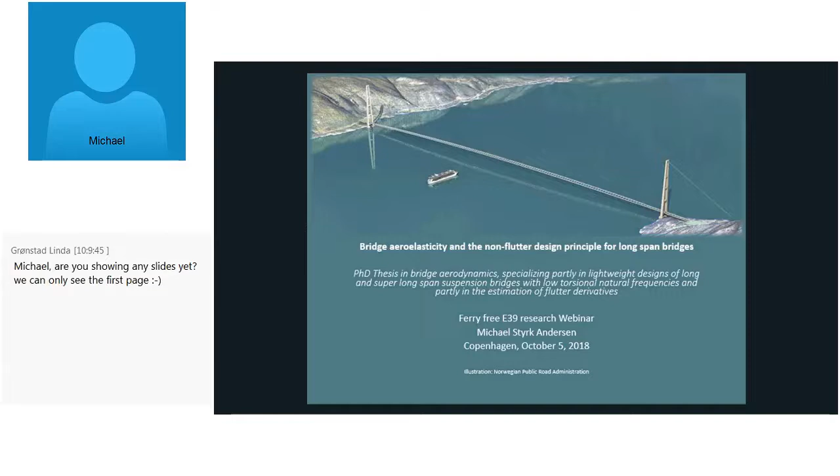So, in order to explain how torsional flutter was avoided in our test, we have to deal with the system identification methods being used and try to enhance them in order to minimize the residual and optimize our model fit to the test. So I did a little bit of development on how to use these methods, and that is also covered in this thesis.

But the main work is the development of a bridge deck where a low torsional natural frequency can be obtained without sacrificing the stiffness in the torsional degree of freedom. This includes several rounds of wind tunnel studies of triple box cross-sections.

When we say a triple box section, it means basically that we have 3 boxes that are mechanically interconnected, and it consists of 3 separated bridge decks, but they are widely separated, so the flow can go across it. If you have 3 decks, one here, one here, one here, the flow can go like this, and no, it's only 3 decks.

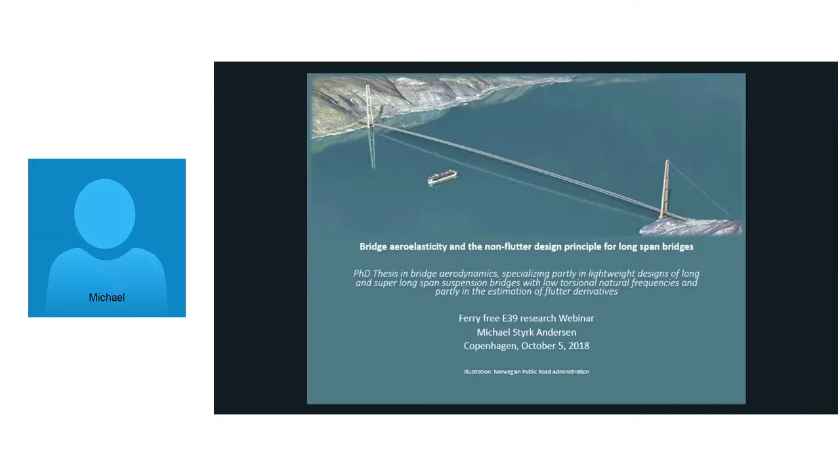So let's move to slide number 2. I guess I already introduced the subject. The rest of the outline is basically a presentation of the main research question, and next what kind of methods I used to study that, and then I will dig a little bit deeper with the main findings. And finally, I will sum up and give the conclusions.

So there are a lot of wide fjords in, for instance, Norway, which should be crossed by very long span bridges or other kinds of structures. And for these straits that are longer than, say, 1.6 or 1.7 kilometers, we need to develop new technology in order to cross them, or at least we know that the way we built bridges in the 60s and 70s in the last century may not be feasible for such long spans. So we're looking at other kinds of designs involving 2 or 3 bridge decks in order to enhance the aerodynamic stability mainly.

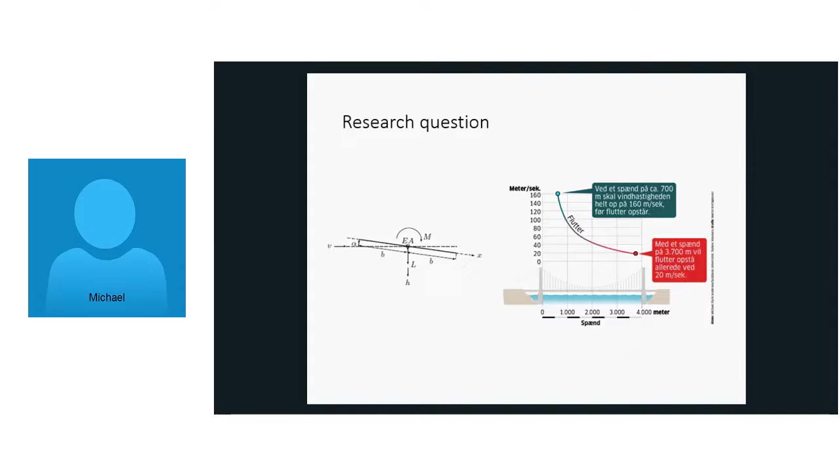And the question I'm trying to answer is: is it possible to design a lightweight bridge deck that is aerodynamically stable by using this non-flutter design principle? And so what is the non-flutter design principle? Yeah, it's basically the hypothesis that flutter can be avoided by having a low torsional to vertical frequency ratio. But is it lower than 1? Is it lower than 1.1? Or is it lower than 1.2?

It's a good question. If you look at the flutter curve, you see that there's no solution to the flutter wind speed below 1.1. So in that case, it would be 1.1. It's an important question, because if you make it 0.7 or 0.8, you have to sacrifice a lot of torsional stiffness in order to go that low.

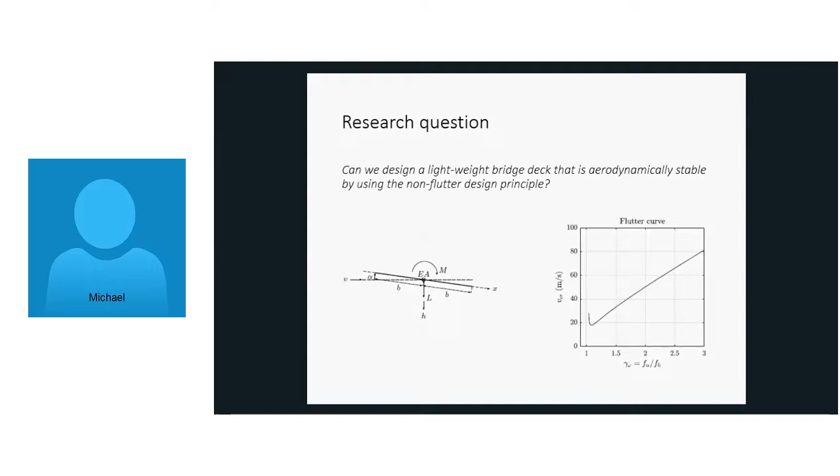But then again, on the other hand, this is just linear theory for a flat plate, and the aerodynamics of a bridge deck that is going to span 2 or 3 kilometers is far more complex than just a simple flat plate. So I'll shortly introduce the methods I've been using.

If you have a simple suspension bridge, which is a phrase that I think was introduced by Arne Selberg, describing a suspension bridge having only a main span and no backstays, we have a given mass and stiffness distribution of the bridge deck and the main cables, which gives us some input we can use in a static analysis. And when we have reached the dead load situation where we have equilibrium, we can conduct a modal analysis to get the frequencies of the vertical and torsional modes, for instance.

These modal parameters are used in the wind tunnel tests we're conducting of a given cross-sectional shape. And the interpretation and the data analysis of these tests tells us a lot about the performance of this kind of shape in the given condition that it is going to operate in. And finally, we can use the results from the wind tunnel test to conduct flutter analysis and static divergence analysis.

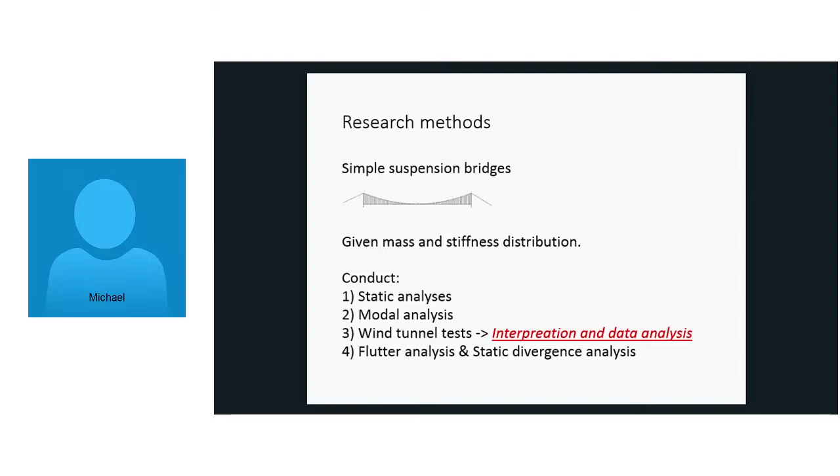Okay, for the static analysis, it's important to realize that these structures are very slender and very flexible. So the displacements of the bridge deck are important for the stiffness distribution in the main cables. It means that you have to iterate until you get the stresses in the dead load situation and thus the stiffness. And if you're looking at the static analysis for the wind, you have to deal with some nonlinear steady aerodynamic loads, which means that you have to solve the equilibrium step by step.

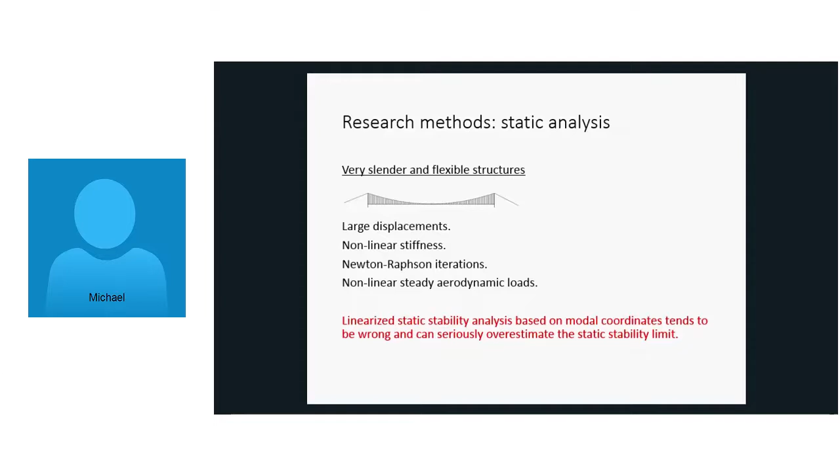And in some of the older textbooks, there's usually a formula for torsional divergence, which is based on the equivalent modal coordinates for pure torsional divergence, and this tends to be wrong and can seriously overestimate the static stability limit, because it relies on a linearization of a highly nonlinear problem when we talk about long-span suspension bridges. So instead, you should use a finite element approach and use Newton-Raphson iterations to get the displacements step by step.

Yeah, you can see the convergence criteria for these Newton-Raphson iterations. When are you satisfied with the displacements you have obtained during your finite element analysis? It's basically defined by the sum of differences between the last steps. So you reach your convergence criteria at the point where the Euclidean norm is below some level which you define in your analysis. You have to reach convergence in order to move on with the aerostatic analysis.

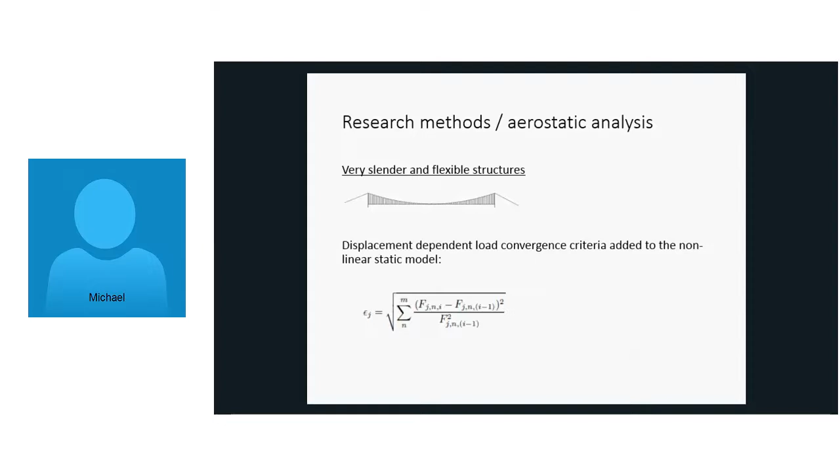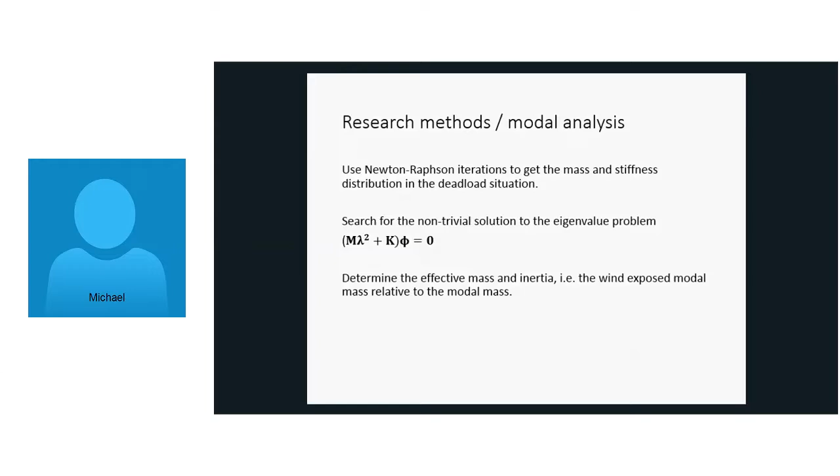When dealing with the modal analysis, we're obtaining the mass and the stiffness distribution in the dead load situation, and then we solve the eigenvalue problem, which gives us the eigenvalues and the mode shapes.

Okay. The wind tunnel tests are conducted for the cross section using different methods. The input to the static analysis is done by having static tests, where we basically measure the forces on the section and normalize them with some geometric parameter of the section.

Then you can do free vibration tests, which is a simulation of the full-scale bridge deck in a model scale, where you reduce the mass and stiffness properties of your finite element model to a 2D or 3D setup in the tunnel, and then you look at the wind and structure interaction in model scale, and you can play around with the parameters and study what this means.

And finally, you can do forced motion tests. I've been working with harmonic forced motion tests of the section, which are used to give the aerodynamic derivatives. You can get the aerodynamic derivatives by free vibration tests as well. I will get into that later.

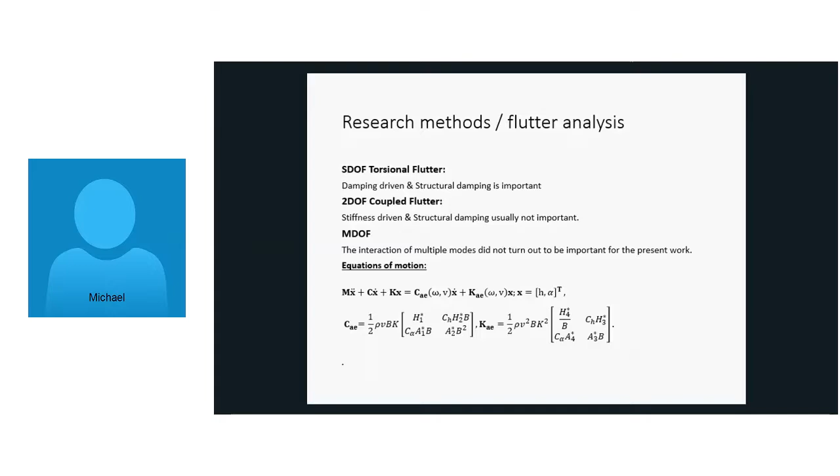And you can see the equations of motion we're trying to solve. We have a mass matrix, a damping matrix, a stiffness matrix, and then we also have an aerodynamic damping matrix and an aerodynamic stiffness matrix, and they depend on frequency and wind speed. Right. So let's move on to the main findings, which are included in my thesis.

And then we basically solve the eigenvalue problem at different span lengths, and we find that the torsional to vertical frequency ratio naturally goes towards a lower level when the span length increases. So it becomes more and more relevant how these kinds of sections perform at low torsional to vertical frequency ratios when we increase the span length.

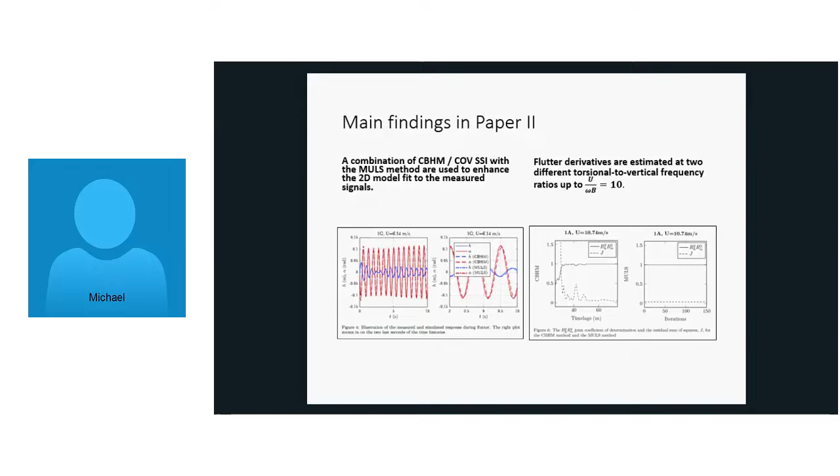So another thing we got from the system identification was a possibility to track the development of the mode shapes of the section in wind. And we see that the vertical mode, so to speak, does not really change with the wind speed, but the mode that is purely torsional in still air becomes a mixed mode of torsional and vertical motion as the wind speed increases.

Another thing we found was that if we have a time history with a free decay, we could split it in several, and we could look at what flutter derivatives we identify at different portions of the free decay, having different amplitudes. And we could see, for instance, for A2 that if we wait a little bit until the amplitude is lower, we will get negative A2 star at the low wind speeds, while if we estimate A2 star in the start of the signal, it is positive. So that indicates that there are some non-linearities of the aeroelastic behavior of this cross-section.

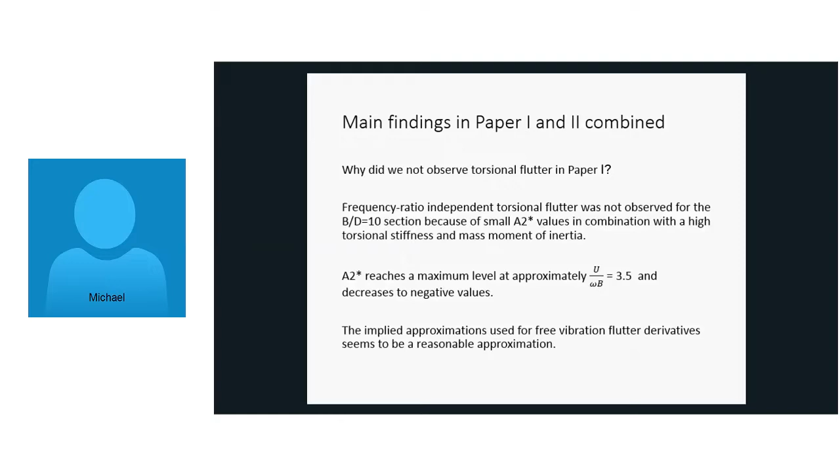So we can also say that these implied approximations used for the free vibration flutter derivatives seem to be a reasonable approximation to determine the flutter wind speed. I will not deal with paper 3 and 4 of my thesis in this presentation, but I will move on to the last paper included in the thesis, which deals with this triple box girder that I tried to develop during my PhD study.

And here you see a cross-section where we have a central box, which is quite narrow, and then the two external boxes quite far away from the central box. The reason it looks like that is in order to make the torsional frequency low and still have a high torsional stiffness, we want a wide separation of the main cables, and we also need a lot of mass that is even more eccentric than the main cables. It means basically that the radius of gyration of this section needs to be larger than the main cable semi-distance, so to speak.

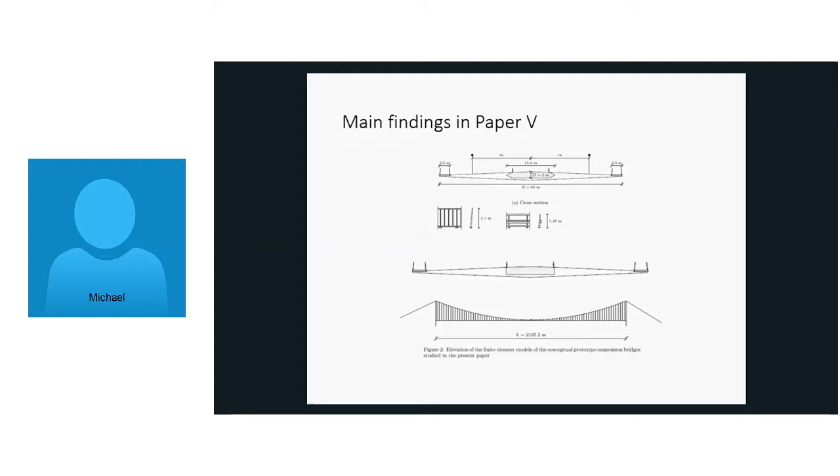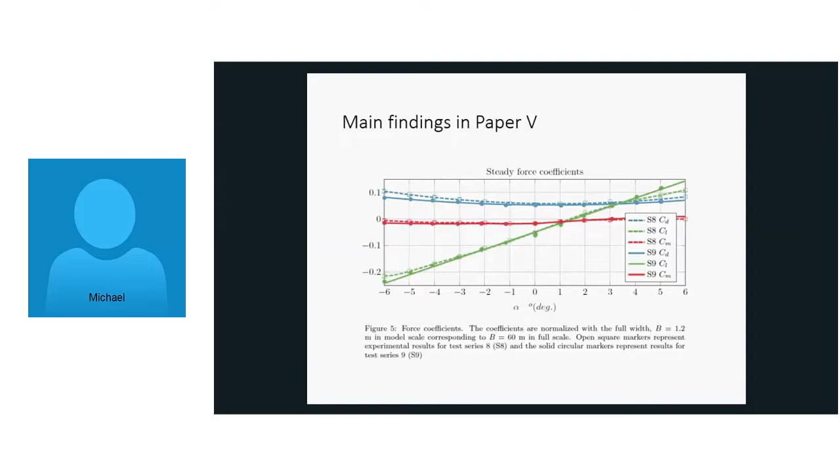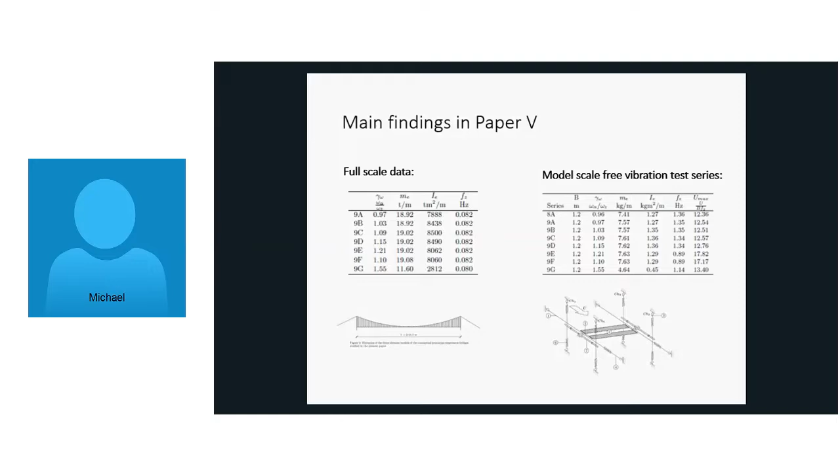But we also see that the section has a really, really high torsional aerodynamic damping. At high wind speeds, it's almost impossible to excite the bridge. It has a very, very high damping, so it's really good against flutter. Compared to a flat plate, the flutter wind speeds are approximately 2 times as high, and using the derivatives obtained from the forced motion tests, we do not get flutter curves having an asymptote similar to the flat plate.

And if we use these derivatives to predict the frequency and damping in wind, we get estimates that agree with the parameters identified by system identification until reduced wind speeds of 5, but at higher wind speeds we get disagreeing results, which may be caused by the static rotation of the section, which again underlines that the behavior of this kind of section is highly nonlinear. Yeah.

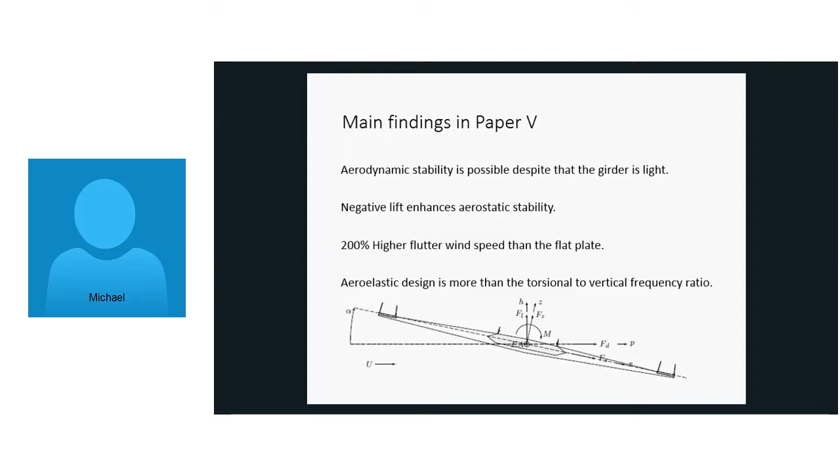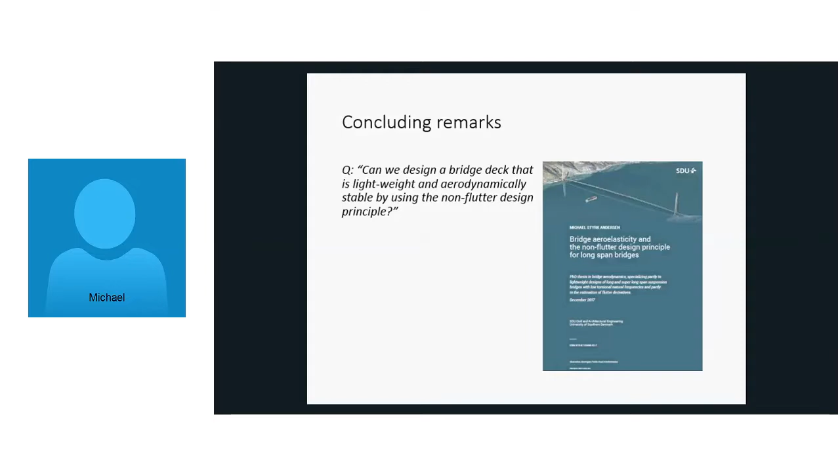And then I just want to sum up and give my recommendation in answering the research question that I posed in the beginning of the presentation. The question was basically, is it possible to design a bridge deck that is lightweight and aerodynamically stable by using the non-flutter design principle? We have the question here, and here comes the answer. And the answer is that it depends. It's possible, but it is definitely not necessary to artificially reduce the torsional stiffness to do so.

In order to go there and design a cross section that has high enough torsional stiffness and has a low torsional frequency, you have to create a very special kind of cross section using 2 or 3 sections, with a wide separation. And for these kinds of sections, flutter is not a problem due to the very, very good aerodynamic properties.

So since flutter is not a problem for these kinds of sections, even if the frequency ratio is only slightly above 1, there's absolutely no reason to reduce the stiffness to avoid flutter. And also the static response is much better when the torsional stiffness is high. So that is the conclusion on this research question.

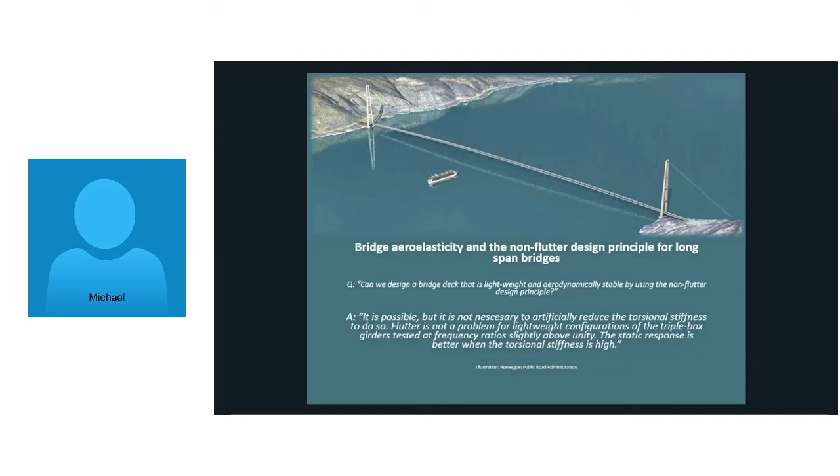But if the lift is negative and you're pulling the bridge deck down, you increase the tension in the main cables and thus the stiffness, so you have positive second order effects. But of course in that case you have to really focus on not exceeding the limit of the stress allowed in the cables. Does it answer your question? Yes, as far as we can go today, I think it's a good answer. Thank you.